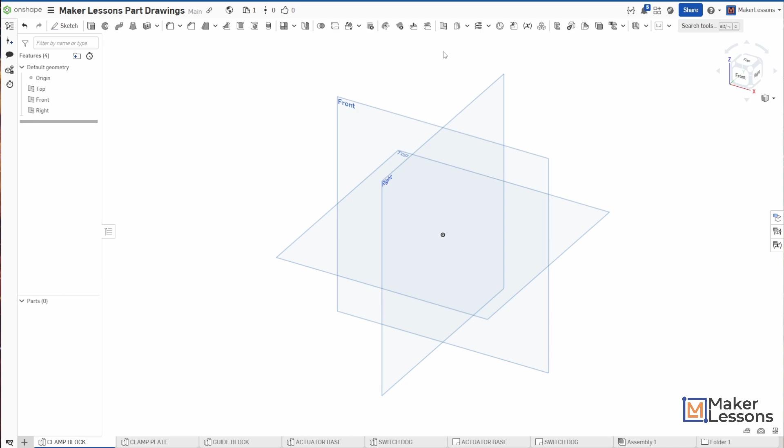Let's begin. I'm going to draw this assuming that this is my right side view coming in this side, and I'll draw a sketch with the full rectangle size of 6 by 4. There's a million ways to do each one of these drawings - this is how I'm choosing to do this one. There's no right or wrong way. So I'm hitting S in Onshape for sketch.

I'm going to choose the right plane - I could have clicked sketch up there as well. To normalize my view, it's important to be looking straight on to our sketch plane. P to turn off the planes because those confuse me if I see them. S again pulls up this shortcut, and I'm going to do center point rectangle, also up there. I'm going to click on the origin, make sure I have the origin in the center of my part. It helps with a lot of things, and it's going to help us later on putting the hole on here.

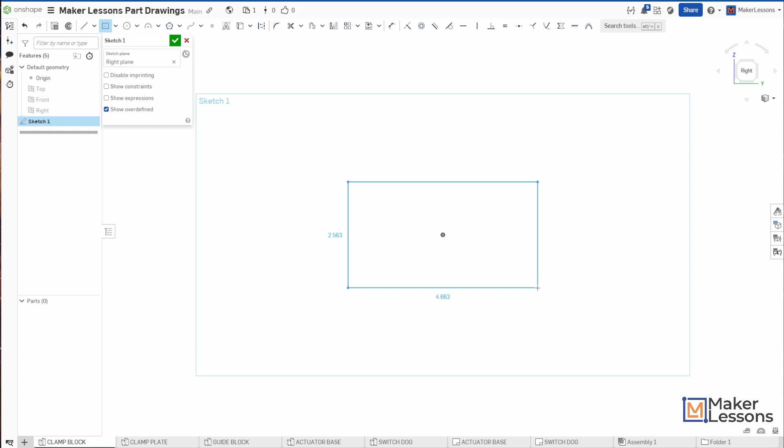I want this sketch to be - if I just click, it is 6, enter, 4, enter. We're fully defined. You can tell because the lines are black, they're not blue. That's important anytime we're drawing a part drawing. I hit escape real quick and just pull this out so it's clean, and I'm more obvious in what I'm doing here.

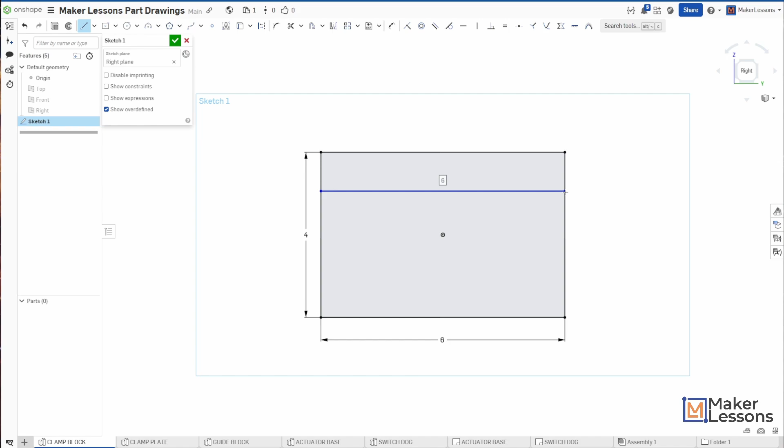So I'm going to hit L now for line, or I could have clicked up there. I'm going to hold my click here - this is orange, I'm holding my click, dragging across, and letting go my click. If I didn't do the hold click, it would have continued a line, and we don't want to do that. Make sure these are horizontal, so it should snap - you should see the horizontal constraint. And letting go of my click.

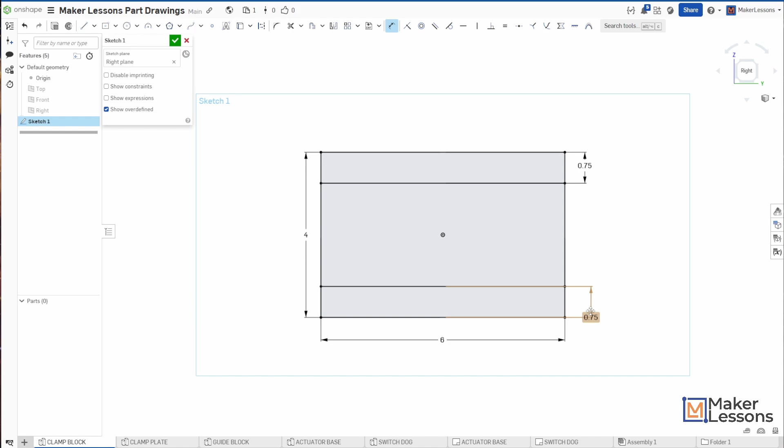Now you'll notice these lines are blue because they are undefined. We need to define them now by looking at our drawing over here. We have a 3/4 inch space, and we can set that over here with a dimension, by pulling it to something else that's defined. So 0.75, and you notice my line is now black - we've defined it. This one here, 0.75. And now my sketch is actually complete - I'm a fully defined sketch.

The only thing missing is the hole, but I'm going to use the hole feature later on. So green check mark. I hit Shift 7 just to orient my view in isometric - I could have clicked on the corner there as well, or the drop down here, isometric. Bunch of ways to do anything in this software.

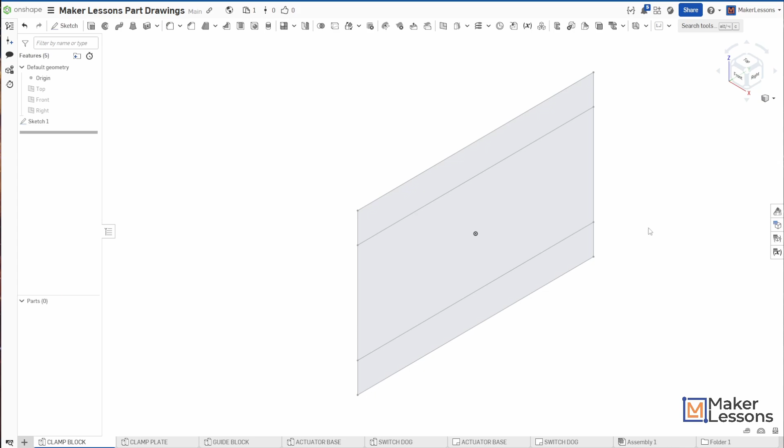Now I'm going to start extruding this. I'm going to do 2 separate extrudes because we have 2 separate depths. Up top here is extrude, or shortcut key Shift E. I'm going to extrude the whole sketch, the whole width of my object - down here it says the whole thing, full distance is 1.25 inches. But the half parts here are 5/8, and 5/8 plus 5/8 is 1.25 inches, so that means this is also 5/8. So I'm going to extrude this guy by 0.625, enter. So I'm pulled out that way.

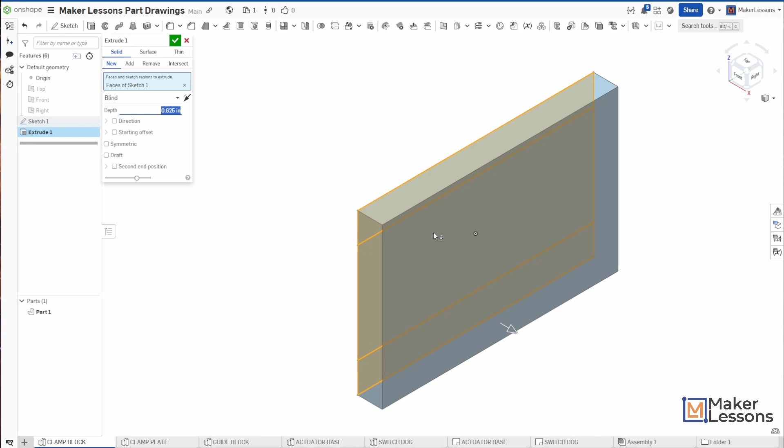I hit the green check mark, it turns off our sketch - we used it. Onshape assumes that we're done using something once we extruded with it. So I'm actually going to go to the eyeball over here and turn it back on because I'm going to do a second extrude. I go back to extrude - a bunch of options here. Before it was new, right? Now when I click on this, it changes to add because that's exactly what we want.

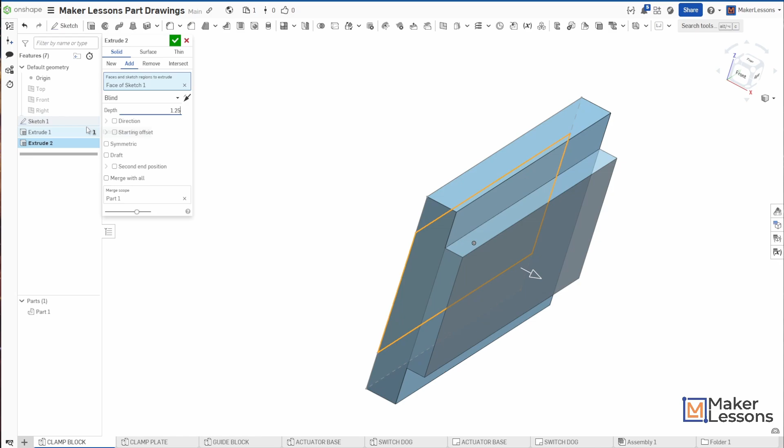We need to add to our previous part. If I hit new, we're going to be making a second part, so we want add. Now the full distance, because the center part is going out 1.25 - recognize here, I turned my sketch back on, and I just clicked on this centered part so that you see this orange outline. That's the only part that's extruding out, 1.25, check mark. Shift 7 - you'll notice now we have our clamp block.

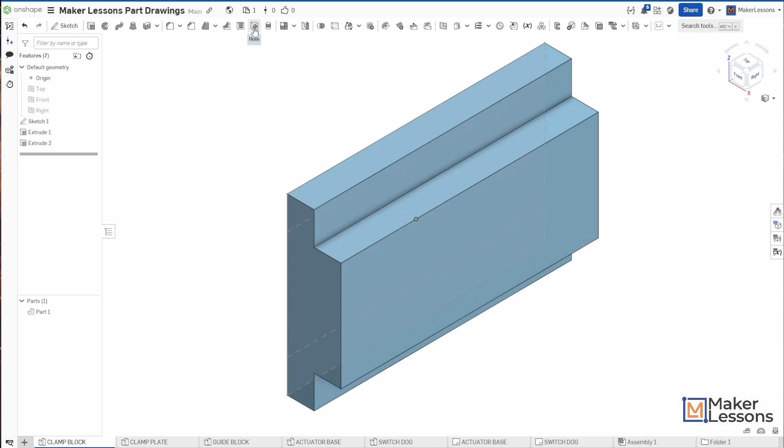Missing the hole in the middle, but we have everything else all based off of the one sketch, 2 separate extrudes. Now up top here for the hole is right here, and looking at our drawing sheet, it says that our drill hole is 1 1/8. So I'm going to orbit around a little bit so I can click on this point a little bit more easily. I go to hole.

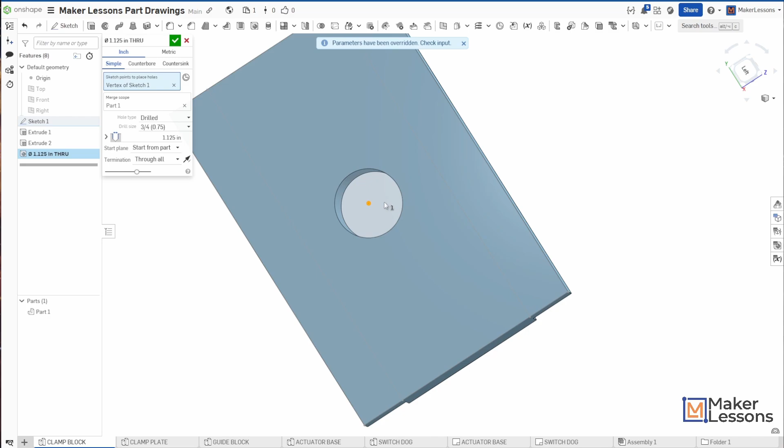Now I want to place the hole here on the origin. If I just click, you'll see that's placed it - good job, it's going through the whole thing. It's a drill hole, a bunch of different hole options here, but we need to set our diameter to 1.125, enter - there it is. It doesn't go past 1 here on drill size, so I just typed in the value here - 1.125 goes through the whole thing, and I can hit green check mark.

All right, we can turn off our sketch again. Shift 7 - there it is. Then just to double check that you did the same thing I did, the scale down here, and we'll check our volume. Part 1, our volume is 23.132 inches cubed. Good luck, have fun.